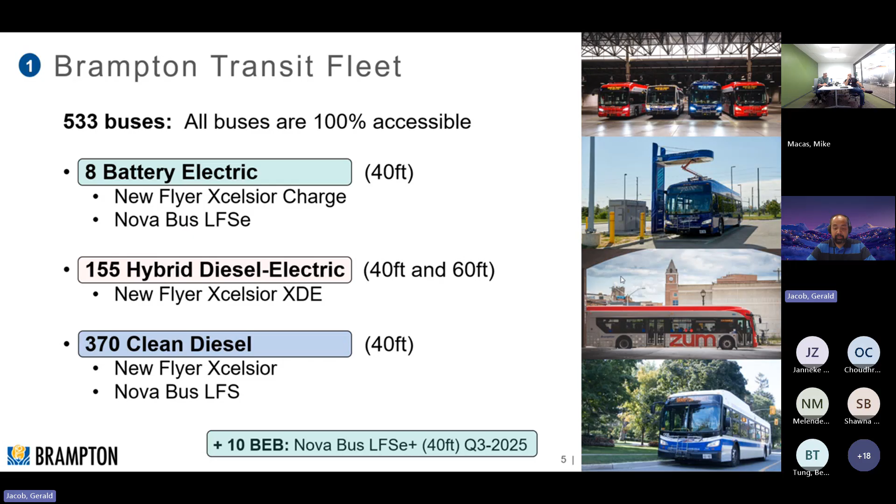So our current fleet, currently we have 533. That's 8 battery electric buses, 155 hybrid diesel electric, and 370 clean diesel buses. Currently, we have 10 new Nova buses that are being commissioned, tested, and prepared for service, hopefully by November of this year.

So how did we try these electric buses? We tried these electric buses through the Pan-Canadian Electric Bus Trial, so the phase 1 trial, as we call it. So in 2021, with the help of CUTRIC, for anybody that doesn't know, CUTRIC is the Canadian Urban Transit Research and Innovation Consortium. It's a little bit more of a handful, but they're the ones that kind of lead the charge for the Canadian trial.

It's the first of its kind in a sense where we brought in a lot of OEMs, we brought in the government, and it's just a unique governance structure. So imagine various manufacturers coming in together for a cost, for interoperability, and to try if these electric buses really do work. This trial started on July 1st and just ended on December 31, 2023.

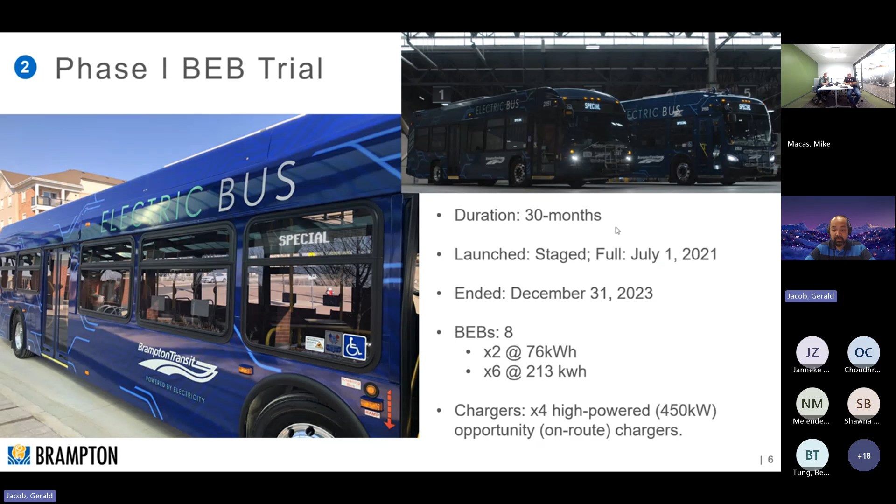We have 8 electric buses that we tried. 2 of them have a 76 kilowatt hour battery. 6 of them have 213, and we have 4 high-power chargers on routes, which I'm going to discuss in a later slide. So for the phase 1 trial, we identified 2 routes. One is Sandalwood and one is Mount Pleasant Village.

As you know, the Sandalwood route is a longer route. It's 59.2 kilometers RTD, has 13 peak bus requirement, and it charges every time it goes to a charging station, which again I'm going to cover in the next couple of slides. The next one is our Mount Pleasant Village route. It's Route 26, 11.2 kilometers, and there are 2 peak buses required on it. So our 2 smaller battery buses service this route for the whole day.

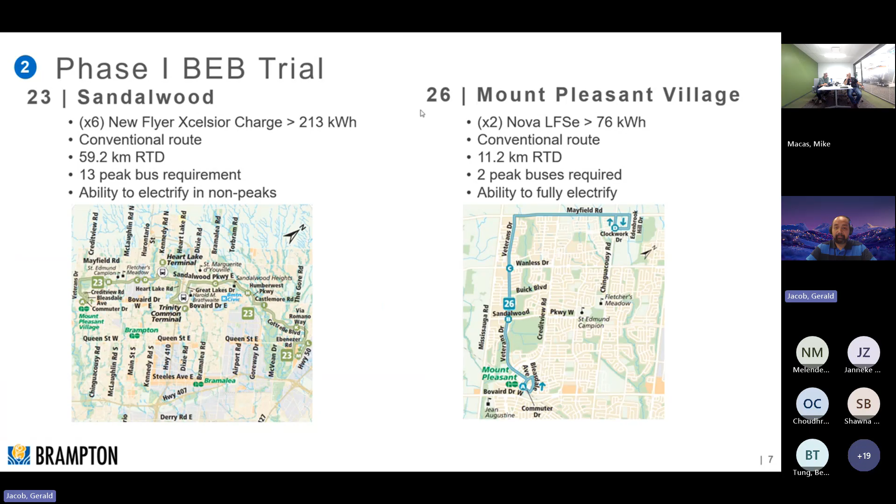During the phase 1 trial, we implemented 4 high-power chargers. 2 of them are at our Mount Pleasant Village terminal. One of them is at our Highway 50 and Queen location, and those chargers are made by ABB. The Siemens one is located at our Sandalwood facility, also a 450 kilowatt Siemens charger. And we had one in-depot charger during the trial made by ChargePoint.

During the eBus trial, what we learned is that if it says 450 kilowatt hour, it's not really 450 kilowatt hour going into the bus. It's what the bus allows it to take. Battery capacity: if you have a 500 kilowatt hour battery capacity, it's not a 500 kilowatt hour capacity. It's stepped down to 90% efficiency. Battery degradation, we have various data regarding battery degradation. Obviously, we're going to have the telematics tell us how the battery is performing. You have your sensitivity analysis.

When it comes to battery electric buses, the first thing that we have is range anxiety. So our operators are asking, can I reach that terminal if I only have X amount of charge? And we can't really tell them at the beginning because we don't know if that range is actually good. But based on the telematics, we can confidently tell the operators if you have 50% SOC, state of charge, you can go there, no problem, and you can charge at that point.

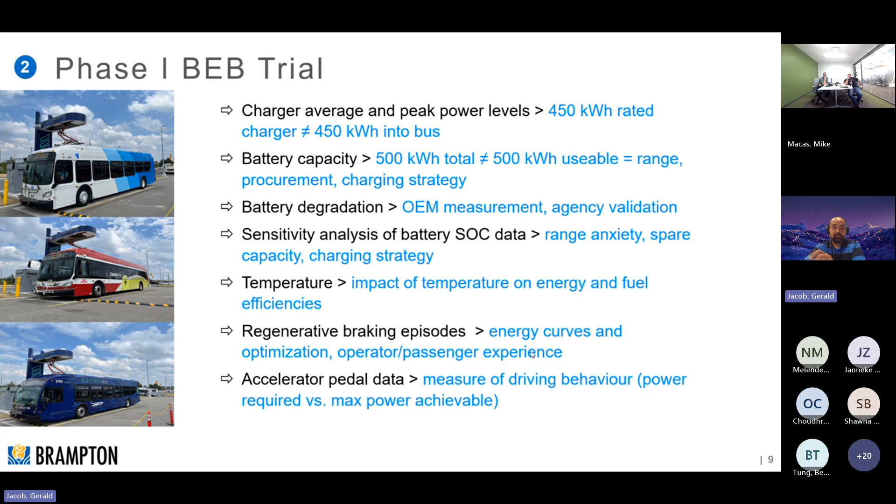So the key objective of our phase 1 trial is full interoperability. We have to address that. Reason being, if we don't have interoperability between chargers and buses, it's going to be a very expensive journey. Imagine buying a Nova bus and it can only use a Nova charger. Then you have a Flyer bus, and you can only have a Flyer charger. In that regard, whatever charger you have, it can charge any bus that you purchase, and that's part of the process of interoperability.

Again, we had huge success. We have a unique governance structure: a bunch of manufacturers come together at a table, trying to achieve a common goal. And again, this trial was during COVID. I know it's a little bit after the lockdowns and everything, but it's during COVID. It was delivered on time and on budget. Our predicted efficiencies are actually what we obtained, which is really good. It basically confirmed our assumptions. Our BEB, we confirmed that it has the highest greenhouse gas reduction.

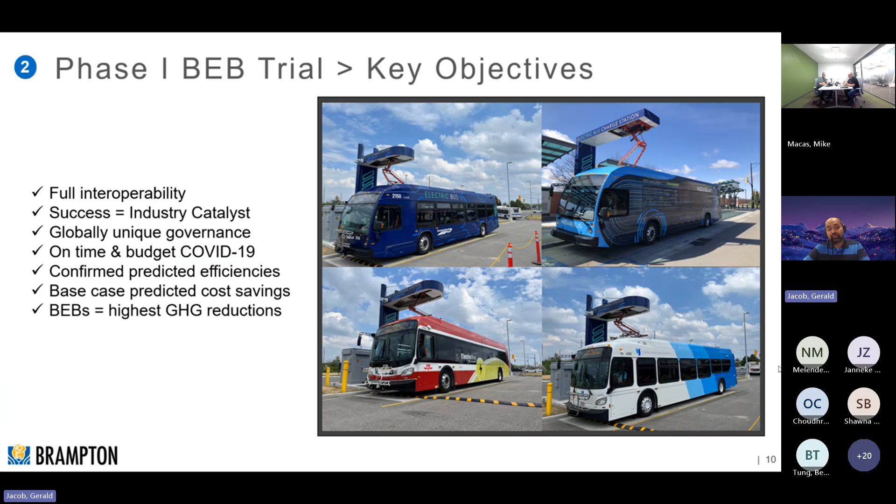During the phase 1 trial, just high level, the total efficiency that we have from our 8 buses is 1.6, which is close to what we predicted initially. It actually performed better than what we predicted initially. And that data has been gathered from July 1st, 2021 till December 31st, 2023.

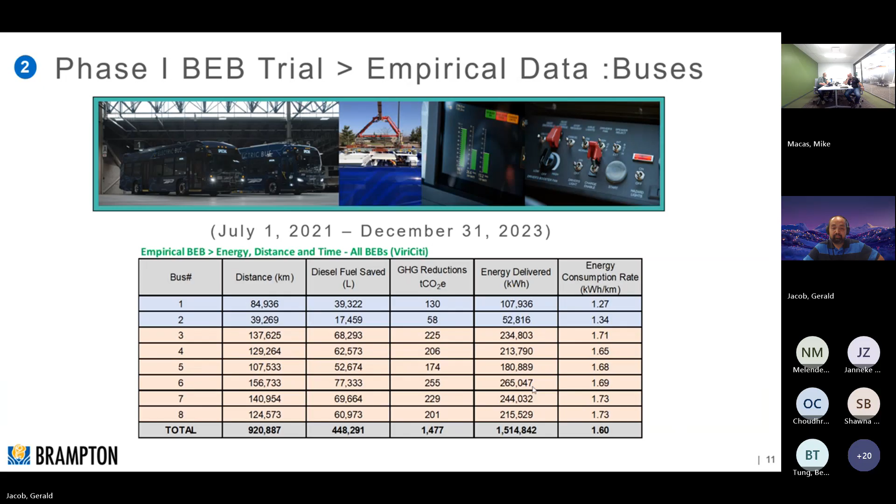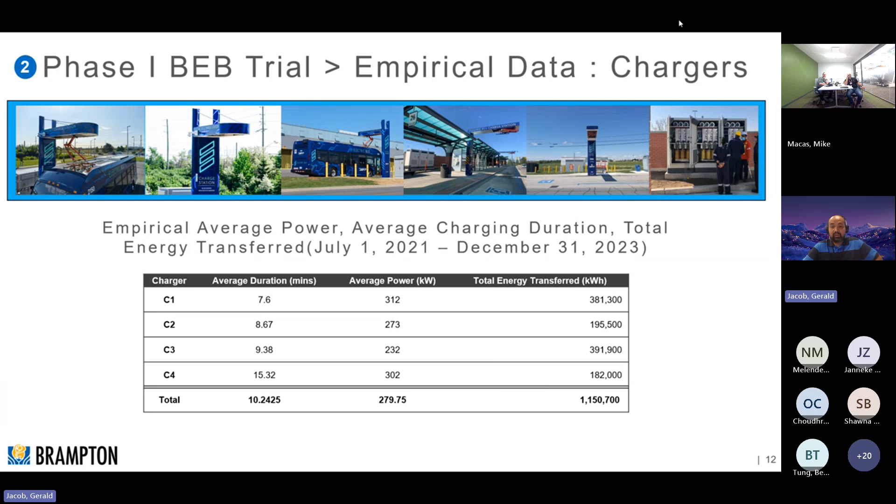Our 4 chargers, so for Mount Pleasant Village to Highway 50 and Queen, total energy transferred is 1.15 million kilowatt hours. Average duration of charge is 10 minutes. Average power transfer is 279.75. So for anybody that likes to analyze data, this is the data. If you want to ask questions, please do ask us during the Q&A.

After that phase 1 trial, we completed our feasibility study. We went to our city council in May 2024. We presented what we call a zero-emission bus implementation strategy and rollout. And that's in partnership with CUTRIC. It's a very extensive study. We figured out how to optimize our routes, what's the best transition, what buses to use, what charging infrastructure do we need.

And this strategy was approved by council in 2024 to basically start our journey to full electrification at the earliest of 2041. We did our GHG estimation on the reduction. So short term, which is 2025 to 2030, medium term, 2031 to 2035, and long term, 2036 to 2050.

With that being said, this is what we're planning to do in the future. As you already know, our phase 1 trial got completed in December 2023. We're now looking at phases 2 and 3. We want to do a fuel cell electric bus trial. Again, we're still in discussion regarding the matter. We want to convert a diesel bus to a battery electric bus. Again, it's a trial. If we don't try it, we won't know if it actually works.

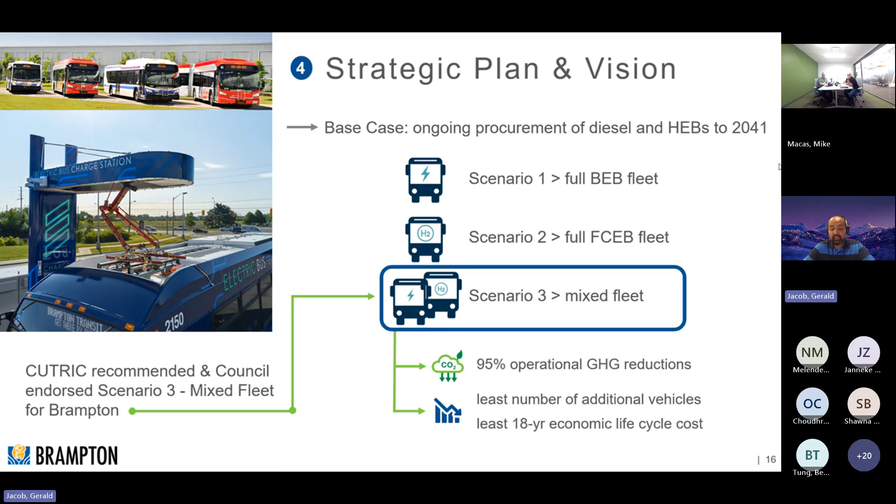So our strategic plan and vision: there were 3 scenarios that CUTRIC looked at, scenario 1, scenario 2, and scenario 3. We ended up with scenario 3, which is a mixed fleet of battery electric bus and hydrogen. We're going to be rebaselining this strategy in 5 years. Maybe a new technology emerges. Maybe there's an improvement in technology. And we'll see if we have to change our strategy or keep going. Scenario 3 predicted a 95% operational GHG reduction, and it's the least amount of vehicles needed for our full transition.

Out of that strategy, we figured out that this is going to be a complex process. It's going to cost a lot of money. We don't know what the market landscape is. There's a lot of unknowns. We're not experts per se in electrification. Our expertise is fixing a bus, putting them in service, and making sure that everybody in Brampton gets to their location on time and safely.

So what we asked CUTRIC to do is find an energy as a service solution. CUTRIC did a market survey and identified what energy as a service is. Energy as a service is going to be doing the infrastructure that we need to transition to full electric vehicles, including hydrogen and battery electric buses. They're going to take the complexity out, because we envision our partner to be somebody that's been in the industry for a long time and has the knowledge and know-how to do this process.

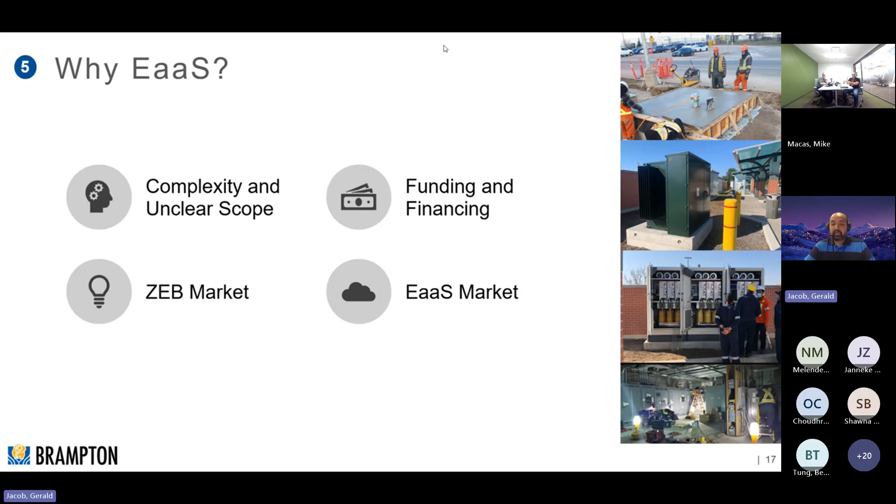On June 15, 2025, we announced our partnership with Zenobe. Zenobe is a UK-based company. They're going to be doing our infrastructure, as the next slide shows. Alectra, our utility provider in Brampton, is still going to supply us the electricity. Zenobe is responsible for the substation, the switchgears, battery storage, generators, solar, and obviously hydrogen in the future, and the energy management. And we are responsible for dispatching the bus. So this is our energy as a service model.

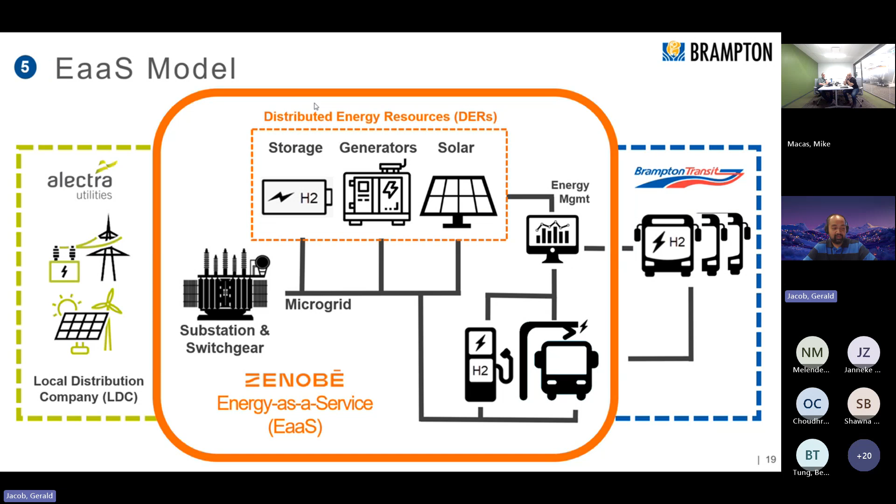On this energy as a service model, we are looking forward to this journey. We're in the design phases now. I don't have a lot to share at the moment, but when the time comes, I'm pretty sure you're going to see more about Brampton's energy as a service journey.

My last part is just lessons learned. Transitioning to BEBs, with all the data that we have, is very complex. We require an extra 10-minute charge time per bus on our Route 23, so you have to factor that into your OPEX. So more staff, increased labor hours, and your infrastructure is very complex. Your station power versus what the BEB can take. You have higher CAPEX and OPEX versus your depot chargers, and again your unplanned downtime.

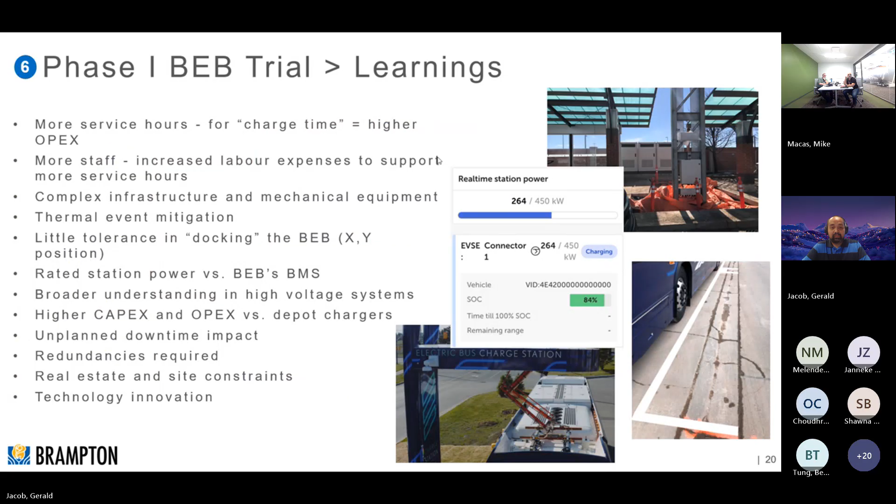En route charging is a big thing. That was probably what we identified as the most difficult part of the whole process. So what we ended up doing is en route charging, and we figured out that if we can do this, we can do everything else.

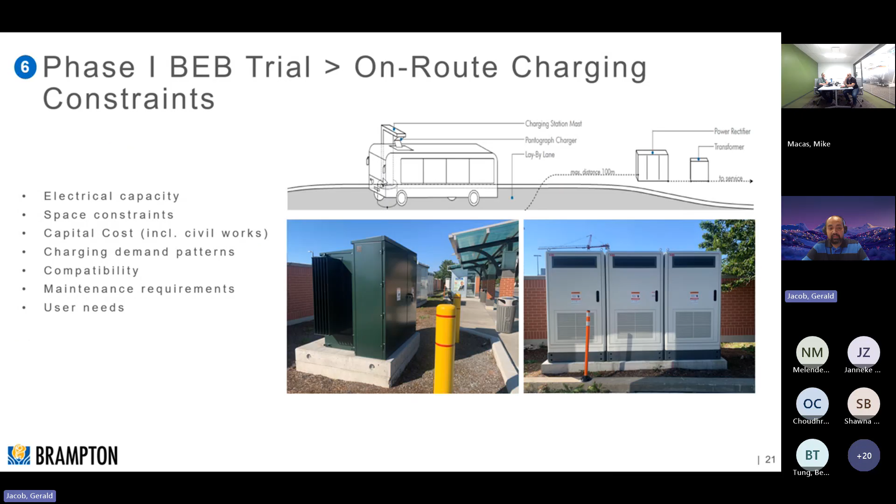Lessons learned. One of our en route chargers is exposed to a lot of elements. If you can see here, there's an angle, and when a truck passes by, there's a lot of turbulence on the vehicle, so there's arcing involved in there. So another factor to consider there. And again, it's very complex.

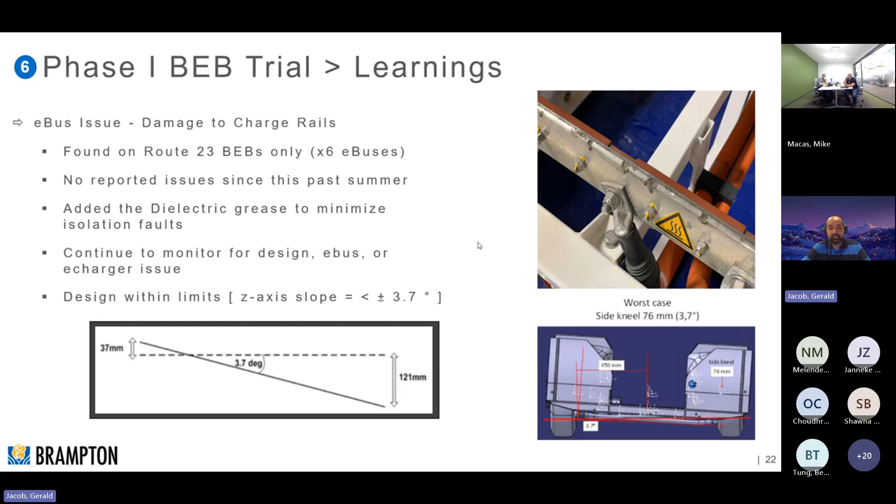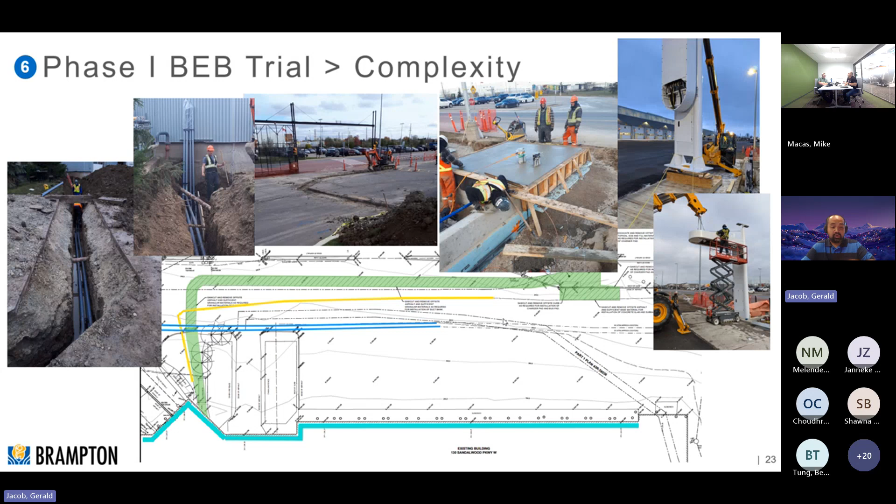If you can see the map here, this is what we have to do to install one of our chargers. We have to move it around and install all the conduits around it. So that's why we have an energy as a service partner.

And last part, again, expect the unexpected. You have water, and electricity and water are really good together. You have your mice in here. By the way, these mice have electrical engineering degrees, because we have 3 sets of cables with full redundancies, and they bit all of them. So our charger went down, and we ended up with no pantograph charger for a good 3 weeks. And again, expect the unexpected.

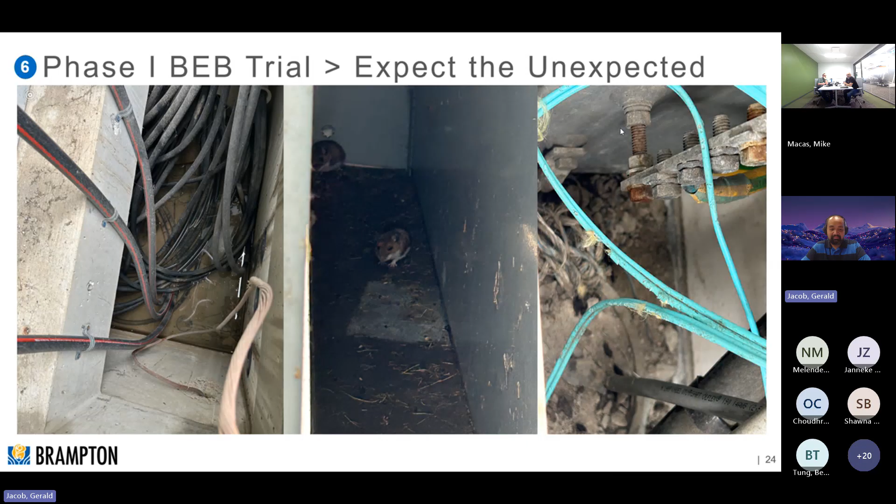But again, we're more than happy to answer any question that anyone will have. That's it for me. I'm gonna pass it to Nelson. Thank you.

Awesome. Thank you, Gerald. That was great. I think we should leave all questions to the end and move on to Mike's and Andrew's presentations, so they get enough time to do their presentations. So if you got questions for Gerald, save them up, and we can ask them at the end. So Mike and Andrew, the floor is yours.

Okay. So why is TTC electrifying our bus fleet? There's a couple of driving forces here. Internationally and nationally, there's targets from the UN Sustainable Development Goals to reduce greenhouse gases by 43% from the 2010 baseline by 2030, and to net zero by 2050. The C40 Fossil Fuel Free Streets Declaration in 2017 to procure only zero emissions buses from 2025 onwards, and the Canadian Net Zero Emissions Accountability Act in 2021, and Canada's commitment to achieve net zero GHG emissions by 2050.

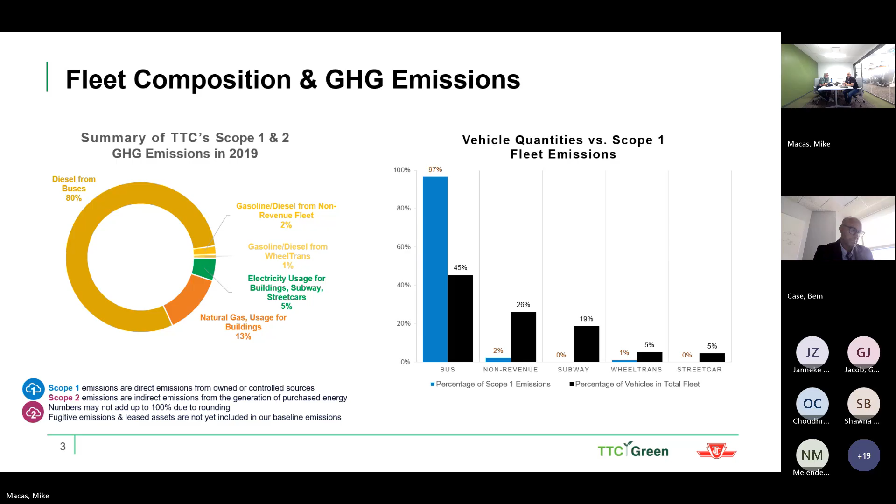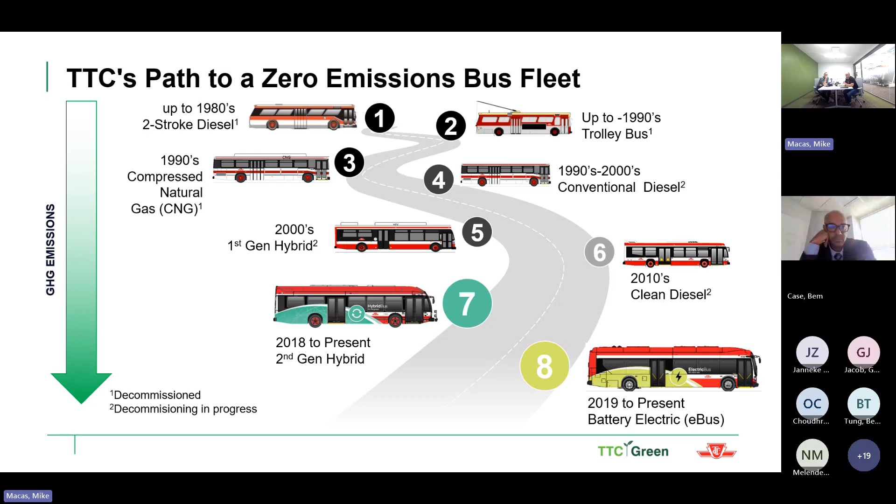Fast forward today, we put almost 7 million kilometers on that particular fleet, and all our lessons learned from that fleet have translated into this current order that we're taking delivery of for 340. So by the end of Q1, we'll have a fleet of 400 electric buses.

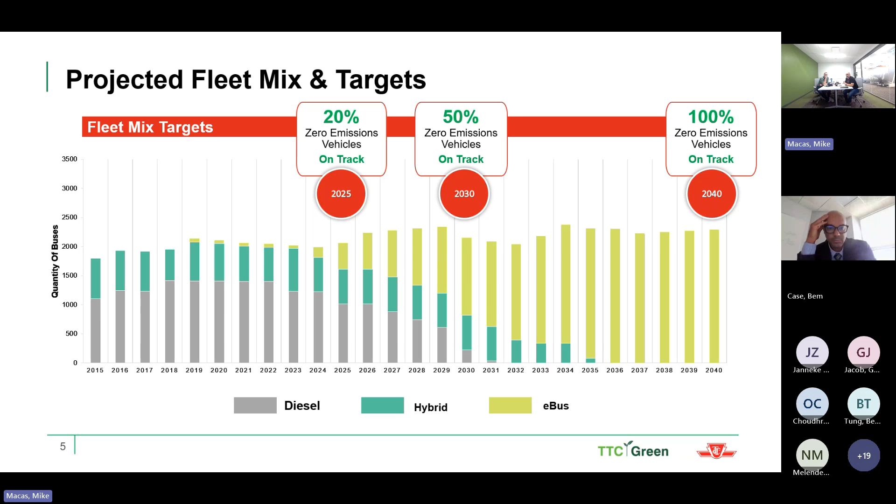So looking at our targets, we're on track right now for 20% in 2025 to be zero emissions. We're on track by 2030 to have half of our fleet be zero emissions, and we're on track to be a fully zero emission fleet by 2040.

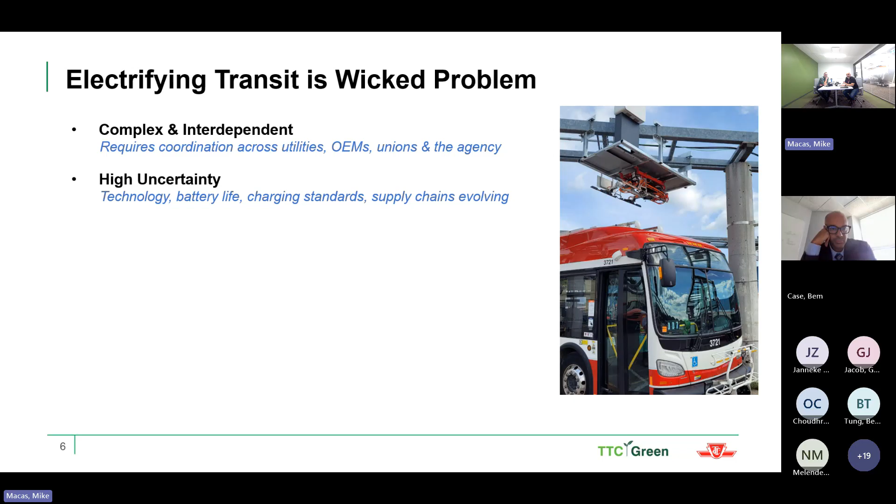So electrifying transit is a wicked problem. It's complex and interdependent, requiring coordination across utilities, OEMs, unions, and the agency itself. There's high uncertainty: the technology itself, battery life, charging standards, supply chains that are always evolving, infrastructure challenges, grid upgrades, space constraints, operation disruptions while you're making all these changes.

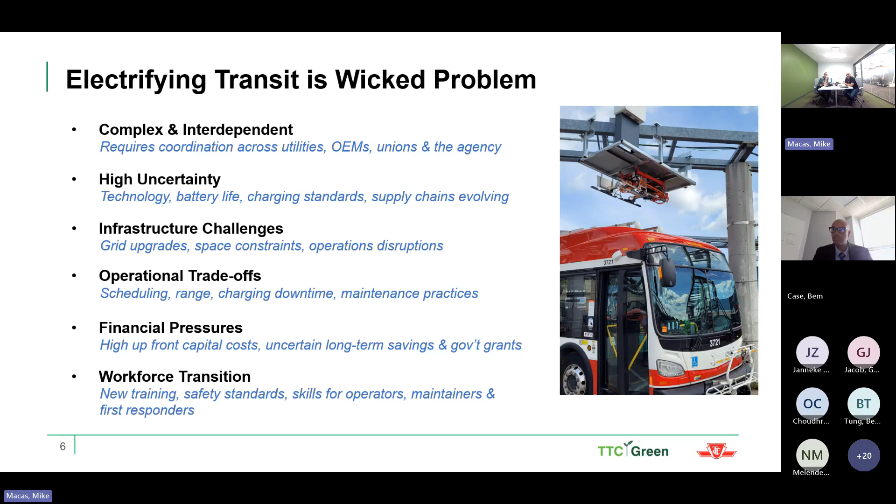Operational trade-offs, so scheduling is different. We have range constraints. We have to account for charging downtime, and we need to change our maintenance practices. Financial pressures, so there's high upfront capital costs for this technology, and there's uncertain long-term savings and government grants. And then finally, workforce transition, so new training, new safety standards, new skills for operators, maintainers, and first responders.

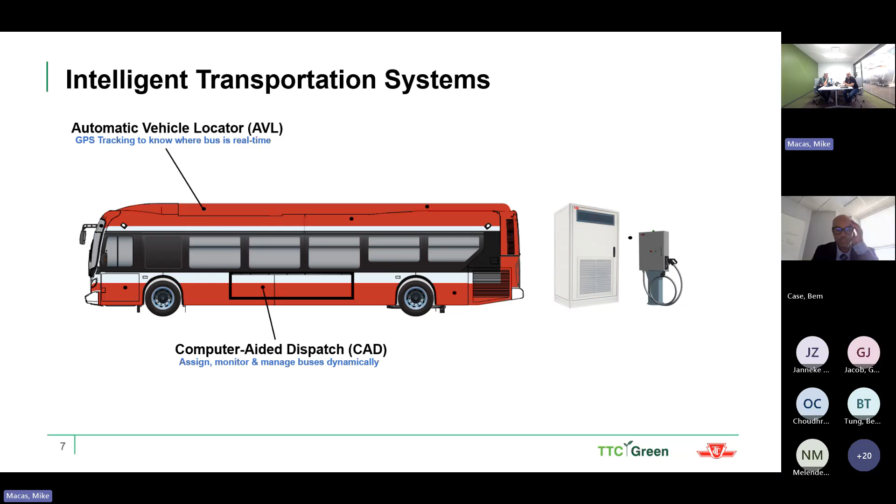So looking at intelligent transportation systems on board our buses, there's quite a few. You have our automatic vehicle locator, so that's GPS tracking to know where the bus is in real time. We have our computer-aided dispatch, where we assign, monitor, and manage buses dynamically. We have automatic passenger counters to track our ridership. We have passenger info systems for real-time arrival info, so that's like your destination signs.

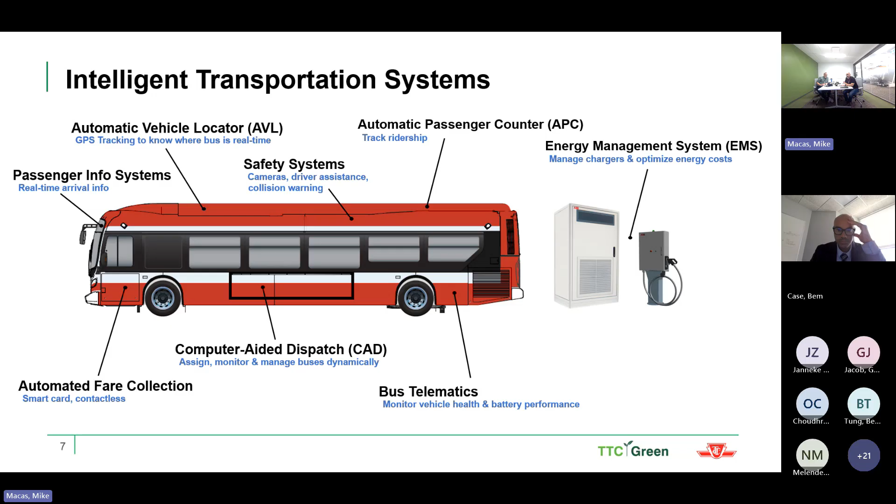Safety systems, you have cameras, driver assistance systems on board, and collision warning systems, which we're currently evaluating at this time. Automated fare collection, so smart card, contactless fares. Bus telematics, so we can monitor vehicle health and battery performance. And then energy management systems to manage chargers and optimize energy costs. So what can we do with that information?

Firstly, the technology maturation with ITS. These buses, although they've been around since 2015, let's say, when the first electric buses arrived in the market, this technology is still evolving. It's still somewhat immature, and a lot of the troubleshooting can be very complex. And so telematic data from the bus is an absolute must in order to expedite the maturation of this technology.

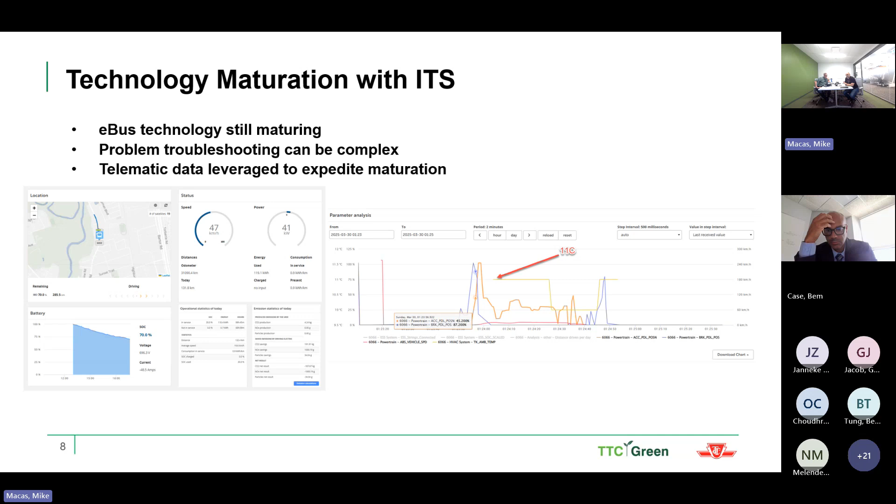And on the right, it's an example of a problem we experienced on a bus and some of the analytics that we can perform by retrieving data from a couple of days, sometimes weeks ago, so we can retrieve signals and try to better understand what the root cause is. And this data has been indispensable for both TTC and also bus OEMs as they're trying to resolve some early issues as these products arrive on site.

Secondly, we need this data for operational planning. There's a change now in the way we manage buses and the way we dispatch them. We have to make data-driven decisions now. We have millions of data points. Like I mentioned, we have almost 7 million kilometers of in-service data from our pilot fleet. So we're leveraging that to make decisions on how to operate these buses and determine the range capability of these buses.

As you can see in the plot on the side, the range capability of these buses varies depending on seasonal impacts with ambient temperature. The blue dots are basically a scatter of all the data. So it's not as simple as just picking a number or picking a range. Range is influenced by ambient temperature, by precipitation, by routes, duty cycles, and the average speeds of those routes. So we're leveraging all this information to make decisions on how to dispatch these buses.

And this is an iterative process where we take data, we set a point for a dispatch range, and we go back and check. And we keep on adjusting those points to maximize utilization of these buses and ensure that they're out in service and putting as much mileage on them as possible so we can continue to learn from them and share our experiences and learnings with the industry.

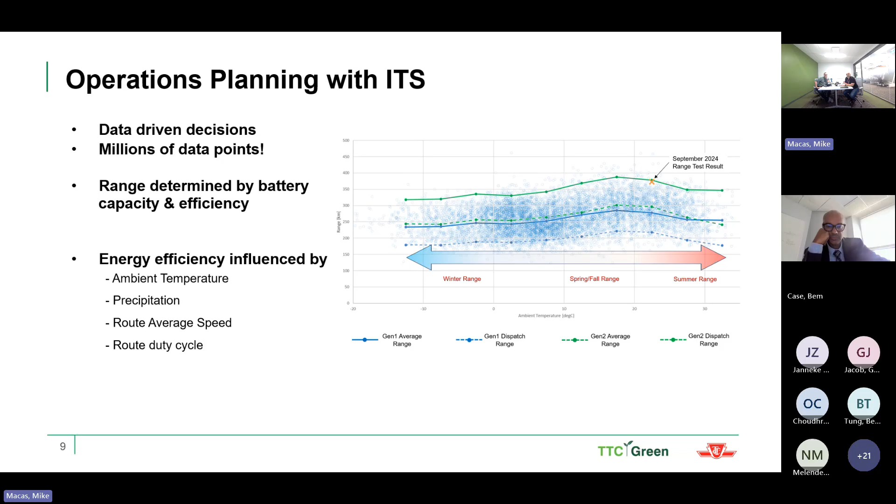And at that point, it really kind of prompts a dialogue between transit control and the operator to understand how much longer they have left on their route, and does the bus have enough charge on board to finish that service, or if we have to plan for a change off. And then the second alert is set at 7% state of charge, and that really leaves us with about 10 to 15 kilometers of range, and that's really meant to just have enough power on board the bus to deadhead back.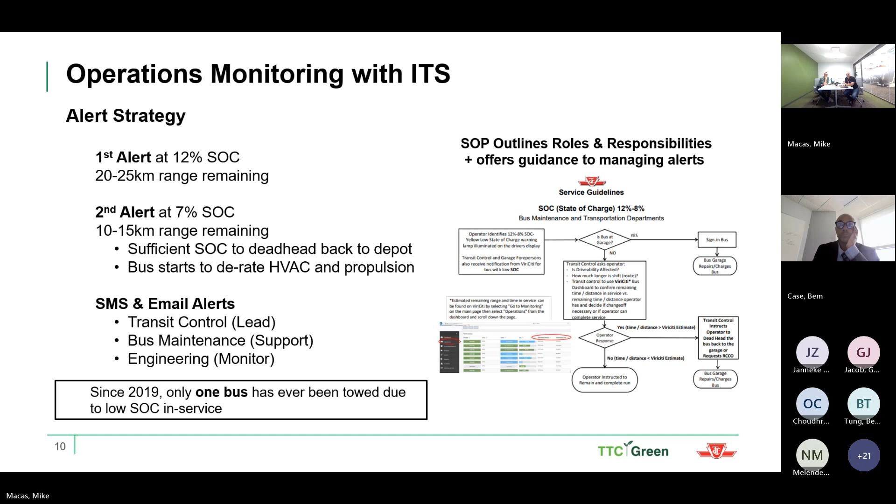Pass it on to Andrew. All right. There, move the laptop.

Okay, so Mike showed you the EMS as a single block. We'll break it down a little bit here. The change to electric buses also comes alongside large-scale changes in how electricity is used and managed, especially at larger consumers like transit agencies. So on the left, you see a variety of sources of power that we either currently have on our site or we're in the process of rolling out.

We have on the right a number of chargers. We can have hundreds of chargers on a single site. We can be running 200, 300 buses out of a single site, and all of that is connected by a large distribution system and then managed by the energy management system.

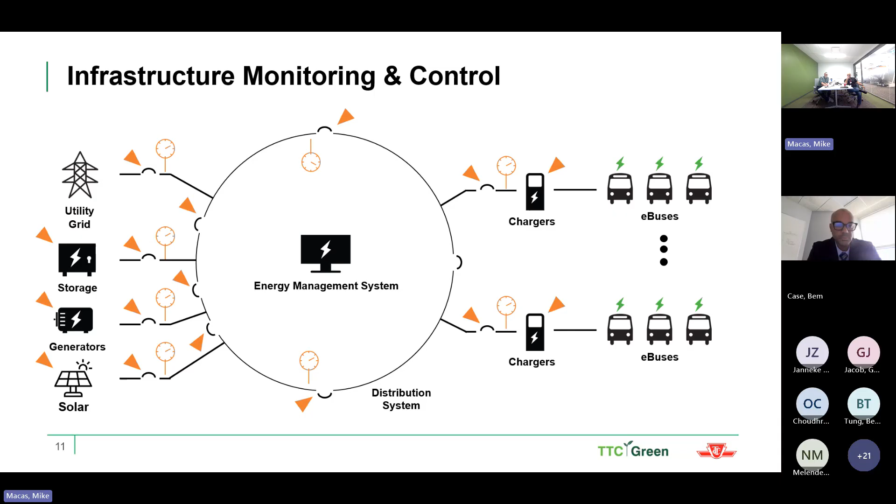One of the nice things about modern electrical systems is we can control pretty much everything in here, from opening and closing of switches to whether our storage systems are drawing or supplying energy to how much our generators might be using, and we can also control our load through our chargers, which means we need a lot of metering. So from an ITS perspective, there's a lot of data happening here and a lot of control possible. That all kind of gets rolled up into a much larger ecosystem.

So that was the physical assets, most of which are on the left here. We also have the things along the bottom, like we may be taking energy pricing data or program data from the IESO to participate in the larger energy markets in the province. We need basic things like weather forecasting for predicting range and things. We might be talking to our building automation systems, fire alarm systems. All of this is even talking to the network systems to know if the networks are up.

And then we've got on the right a lot of the same systems that Mike showed around the bus. So your telematics, where your vehicles are, what they're assigned to do, how many people are on them, what the routes look like. All of that comes together into, arguably all of this becomes part of the energy management system.

Really, all we're trying to do with all of that is two key things, which is optimize our power demand, because we have reasonable indications this can reduce our power draw for a full bus garage from maybe 18 megawatts to 12 megawatts, so a pretty profound reduction in power. And also maximize our bus utilization, especially while we're running a mixed fleet.

We want to put as many miles as we can on the electric bus fleet, even in light of some power limitations at some of our early sites. So we want to make sure we can utilize those buses to the best of their ability. So far, the items in green are what we've managed to accomplish. There's obviously a very large problem, and it's not a solution you can just buy off the shelf today. So we're taking a very staged approach to this.

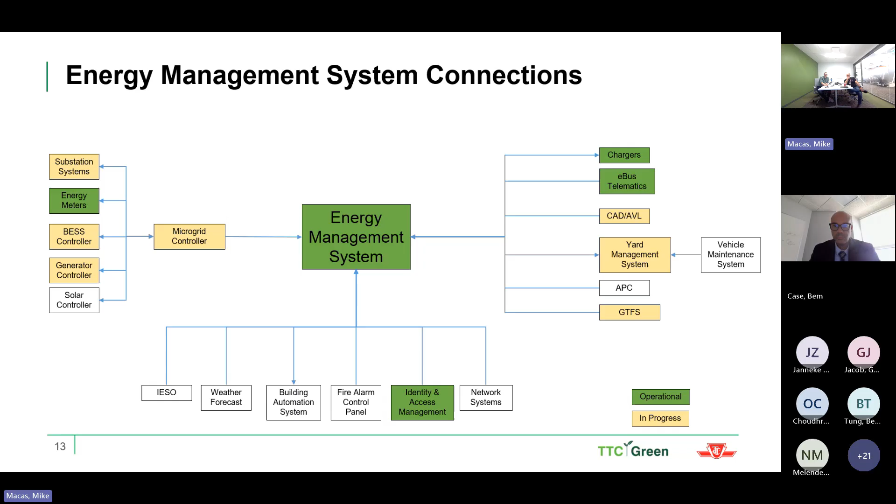And so far, we find it's generally feasible, but obviously, as I mentioned, this is something that doesn't really exist off the shelf. So from an ITS standpoint, there's a lot of data interchange issues. Obviously, there's no standard interface formats for some of these data types as you try to join these two large systems together. Sometimes there is a standard interface, but it lacks features.

A good example is it's nearly impossible to get a vehicle unique identifier through a level 2 charger, the kind of charger you might have at home. We use those for some of our smaller vehicles, like paratransit vehicles. It won't tell you what vehicle is connected. So even where you have a standard interface, it doesn't always have all the features you need. So you need to develop workarounds.

You're writing custom APIs for every single pair of systems you need to connect. Even when you have an API and you have a standard interface, sometimes it doesn't work when you try it because you're the first person to try it. So all the kind of standard things you'd expect on a new sort of endeavor. Plus, also we run into data ownership, IP rights, security concerns as well.

Right? These are systems that are targets for hackers. So our security is obviously high. It's pretty high stakes. If you were to hack a single bus garage, tens of thousands of people rely on that bus garage to put out service every day. So cybersecurity is obviously a big issue.

And then folks don't want to give up their data ownership. Everyone wants a piece of this pie. So sometimes just the contractual issues create issues. All this is just resulting in extra time and extra costs. So we're hoping that some of those systems get addressed as we work on this.

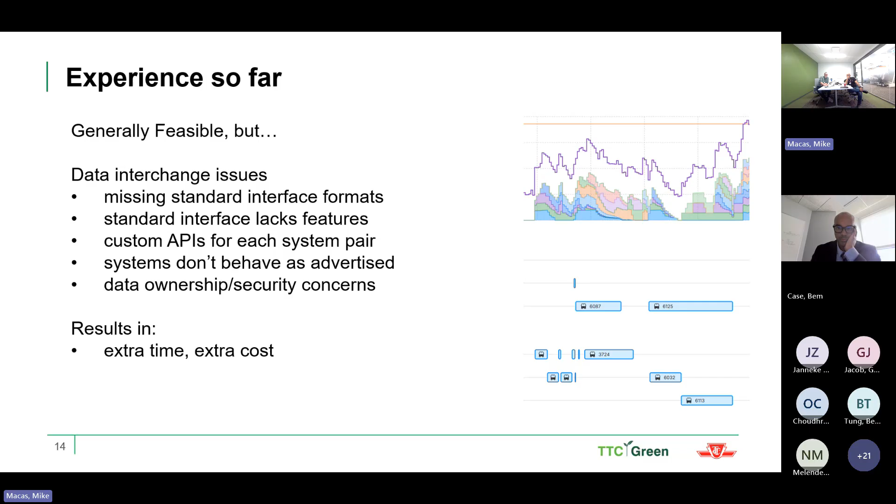Some of the lessons that we've learned, especially with regard to the data stuff, starting simple is definitely the way to go. If you can start with monitoring, then you can prove out that the system is inherently reliable. You start with limited controls of things as you work towards full control, and then you optimize. We do that both on individual functions and with individual pieces of equipment, as well as the system as a whole. So baby steps, we're taking a lot of small steps, and it's very easy to manage.

Testing is obviously very important, especially starting with very simple tests just to prove basic connections and capabilities. We don't want to go to sort of full-scale tests of algorithms if we don't know: can you start a charger? Can you stop a charger? You need to start basic and build up, especially as we were in the early stages of this transition.

And then one of the big lessons we learned is starting with simple, clear descriptions so that everybody is on board with what the system is going to do, developers understand what we need from it as transit agency people, and we understand what the developer is writing, so we exchange languages. We exchange the requirements in very simple language, typically things like user stories, stuff like that from Agile.

And then just a little bit to tie this back to energy as a service as well. So we do have a charging system supplier. So we are in sort of an energy as a service model, and so we have a service provider that's taking on a lot of that complexity and integration risk, which is nice. It doesn't relieve all of the burden from the operator. We still need to make sure that we understand what we're trying to optimize, and different optimizations work against each other. That data ownership and rights issue is important to make sure you've got nailed down first. You want to make sure you've got ownership of your data.